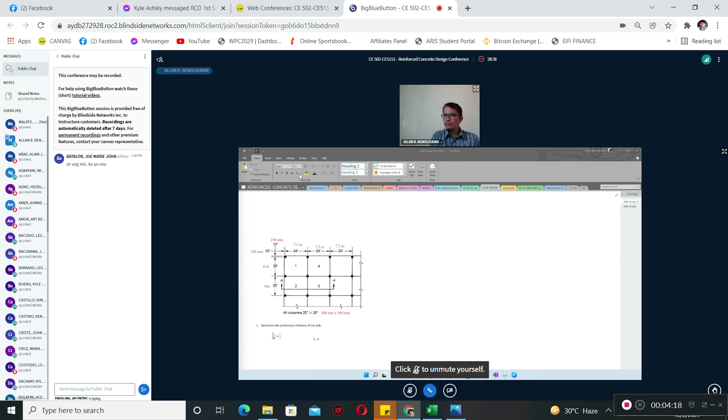Silence... does it mean that silence is that you understand? Well, let's try this. So I would like you to please understand.

Now, this is to me a very nice experience, very nice experience for all of us, especially if you're going to model that one. I know that it will take us time to do moment distribution method, or if you want, slope deflection method for the frame, because it will take you a lot of time. Even me, I think I will not do that.

So instead, I said that you are going to use STAAD, and I would like to know now if... anyway, Malate already said that he's just doing something more on the STAAD. I hope that you are there already. It needs time, okay?

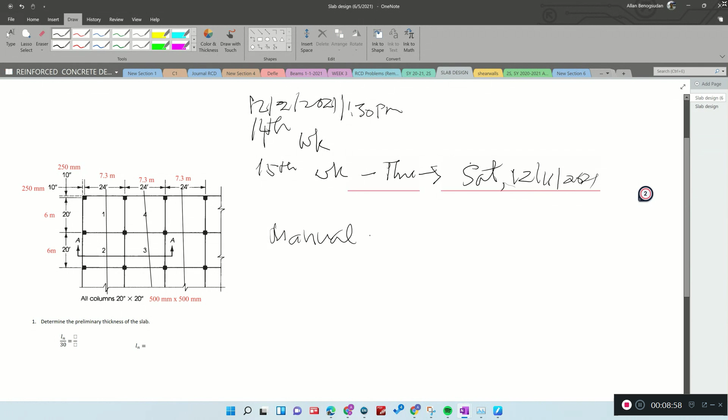Okay, manual design of all your design. Manual picture design, yung resibo kanina. Many times I said that, many times I said that.

If only all our students are doing this, I think all of us are immersed in doing calculations, and I think you have a very good fighting chance during the licensure exam. I think this is the best way to do these things.

Okay, now you please doing this, okay, start doing the calculations, because when you don't have this, you have a lot of deductions. Okay, because first you do not follow instruction. Okay, I'll repeat.

Okay, maybe you will wonder that you did not make it in this class because I also have you also have your what we call this design report. Okay, but as I've said many times already.

Okay, I'll repeat. Okay, you're doing this in Staad. All the models that you are going to do, you do it in Staad so that you can easily just get all those, whether it's axial, whether it's torsion, whether it's shear, whether it's flexure.

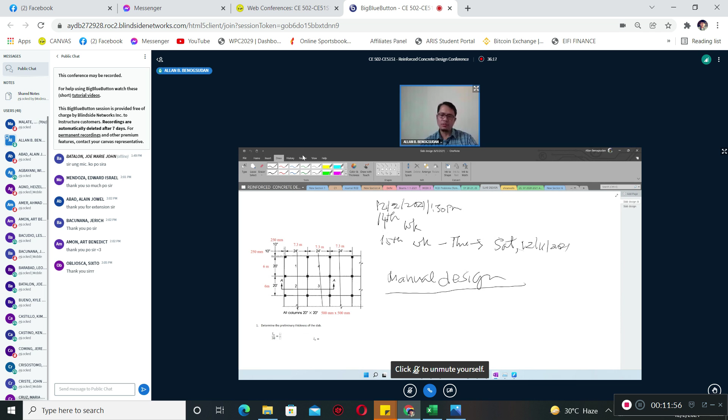It would be better if you have it this time. I think I myself used to call it creative delay for our students. What is creative delay? Some of our students are, how can I describe them, they are late bloomers. Sometimes some of our students only get their best when they fail. As I've said, some of our students who top the licensure exam, I'm not saying it's because of me.

No, it's not. It's all our department. We help each one of us to get you through the licensure exam. That's our thing.

Okay, and of course, especially me because I'm your leader, if our students cannot make it through the licensure exam, let us pause for a while and think about it. What could be the reason? What could be the reason?

So when you are with me and sometimes you did not make it, I would say it's a creative delay. You'd rather have it, you'd rather fail here rather than in the licensure exam.

And also, the best way to do that is you always have that mindset of I'm going to make it, I'm going to make it, I'm going to make it. But when you do those positive affirmations and you have not done anything, I think...

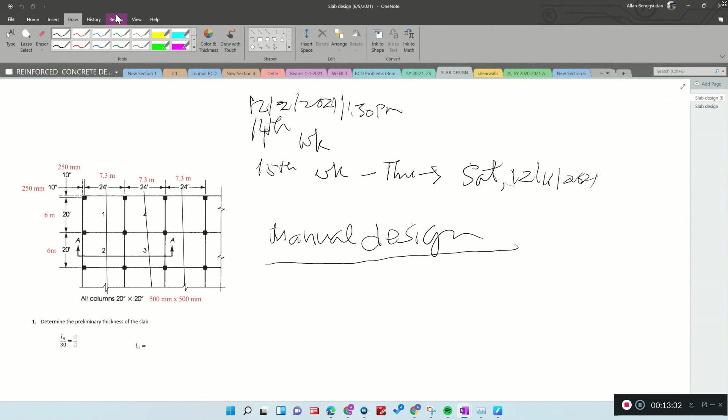Kumbaga sa atin sa Tagalog, taliwas yun, di ba? Taliwas. So kailan lang lumabas yung licensure and that it's sad, okay? It's sad. Get this.

We can easily just get. Now what about this? Like As fy. What about this? 0.85 f prime c. Is that right? So you can lay out that, you can lay out these equations.

So you just have to look at all those things that we have discussed and apply that. Okay?

That is when it's only tension. Now what if you are going to consider, now all of these are hypothetical. So how am I going to check your work? I hope that I'm going to have all these things recorded. We have recorded this. So how do we check our work? That is that you have gone through this...

Hypothetically comparing, comparing what if this one is this, what if this one is that. Okay, just for the computation of this design. Okay, now is that mu the one that you are going to take here? Think about it.

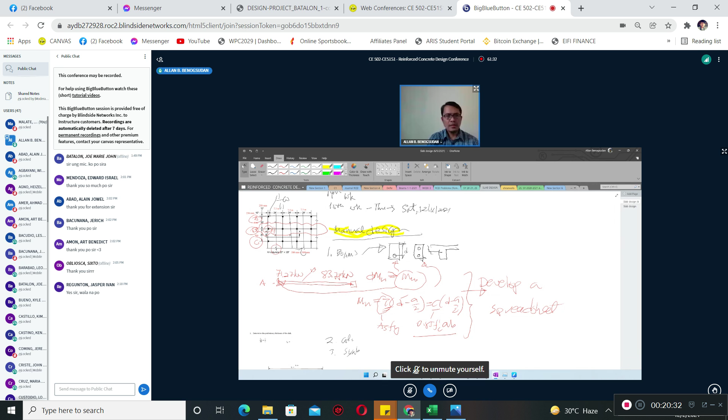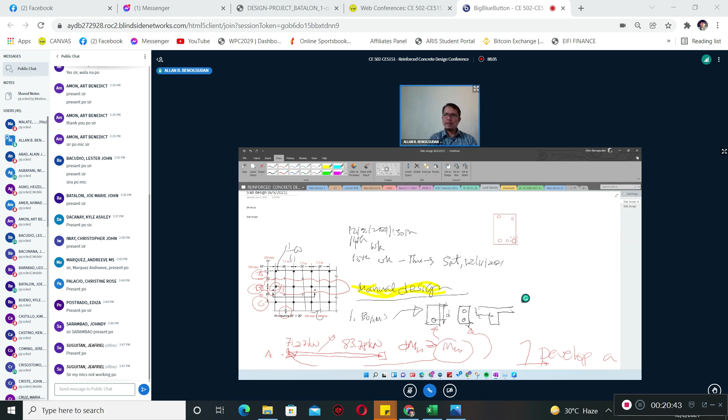STAAD will give that one to you, and all the moments - you just have to get the moment and that's it. Do you understand what I'm talking about? I do not know if you understand.

You have to say. So again, this is our fifth meeting for discussing this, and I think we just give justice for the entire 6 units. This is our fifth meeting for this. We still have time.

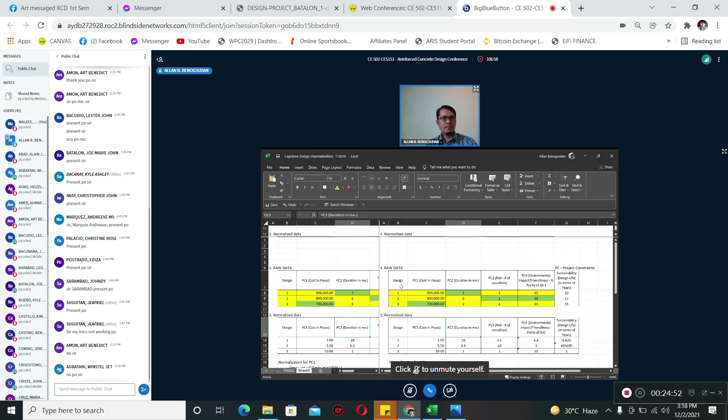Tell me if I'm not able to. Okay, so this is the raw data. You have, for example, design one, two, three. This can be likened to what we call trade-off. And this one, PC1, PC2, PC3, and so on. Here in this example, we have five constraints.

Pili ka nga dito - one, two, three, four, five constraints. Five constraints, ano?

We have to know how much is design one. For example, you are talking about a trade-off in terms of framing. Framing is undoubtedly part of the building design.

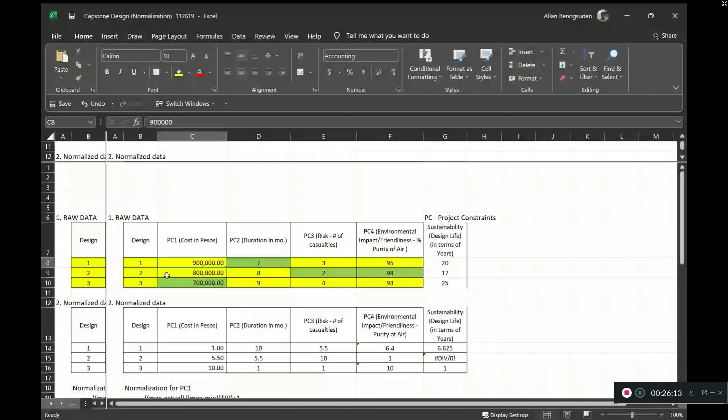So we have gravity, and now we have also LFRS. So then we compute that. How do we compute this? Do you know how to do that? I think you know how to do this.

So I think in doing this, you just have to get a representative sample. Say for example, if you have a frame that is a 5-story frame or whatever, then maybe we can compute that design. That's why it's important that we have an initial design, and then we finally do that one in chapter 4.

Now, if you can get data like what we have from Max Fajardo - are you familiar with Max Fajardo, where we have numbers to multiply so that we'll be able to get the number of bags for cement and so on. That's how we do that.

For example, another trade-off for the flooring - you try to do per square meter. You can do it entirely first. Anyway, it's just that.

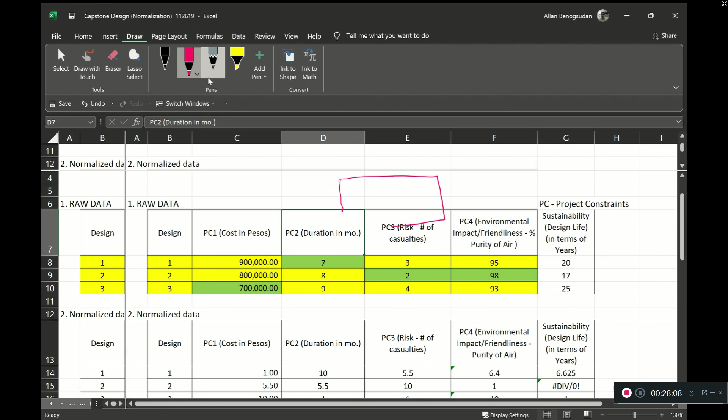Have to draw for a while, okay? I think it can also be a thing that you just do. You just don't know how to do it.

For example, that one is overall—what is it? 30 meters, 75 meters, 24 meters. So that's the entire slab. Do you think we can just design 1 meter by 1 meter? Or maybe we can do this all throughout. Then we get, if that is your slab, okay, so if that is, say for example, 180.

80 mm, for example. I have a design supposedly to discuss with you, but I'd like to discuss it because maybe you don't have much time to do these things. So this is your thickness of the slab, and you have gone through how you were able to say it's 180. So you can say thickness is equal to L over 20.

That's our technical side. So you want now to do that. So the area is equal to 75 multiplied by how much is that? Say for example that is 25. 25 square, that is in terms of square meters.

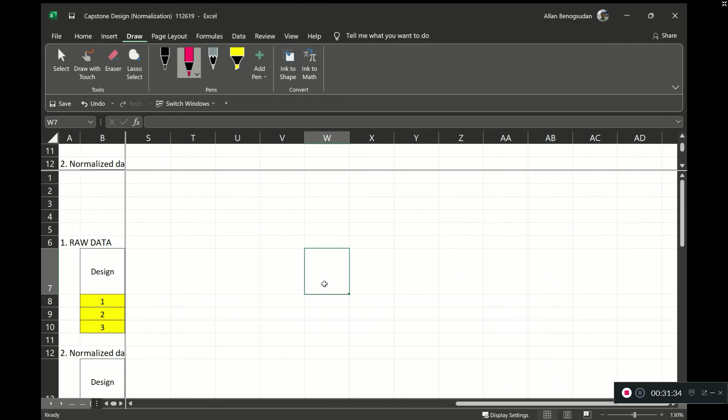Please tell me if I'm out of your range. Okay, say for example, just an example, this is 1,000 mm. One is 180. So you can get the volume here. Okay.

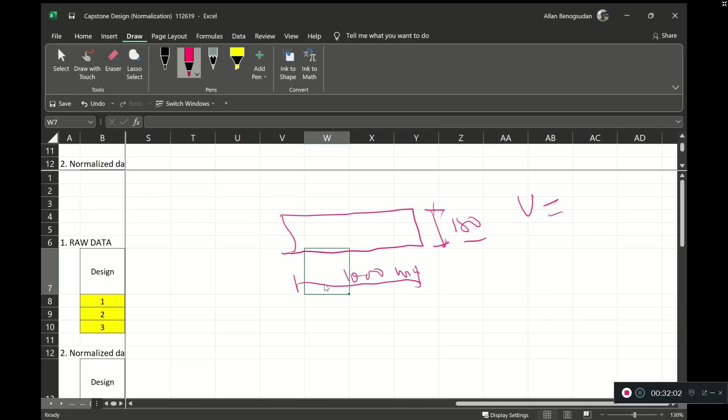That area, that is when you design—that is when you design for one way. Okay, so we will discuss that. So the area which we have done already, multiplied by 0.180, then you have your volume. Is that correct? So on and so forth for this. So you have your concrete.

Have your rebar, you have your formworks. But I hope that you have these parameters already from your capstone design one. Do you understand when I say parameter? Okay, so that you know, if you have this area, that can be good, that can be good if your costing, for example, for the flooring is equivalent to either per cubic meter or per square meter.

Per meter. But no, I'm sorry, I'm talking about per square meter, pesos per square meter. But I think the drawback here is that you still have to categorize what thickness. Did you get me?

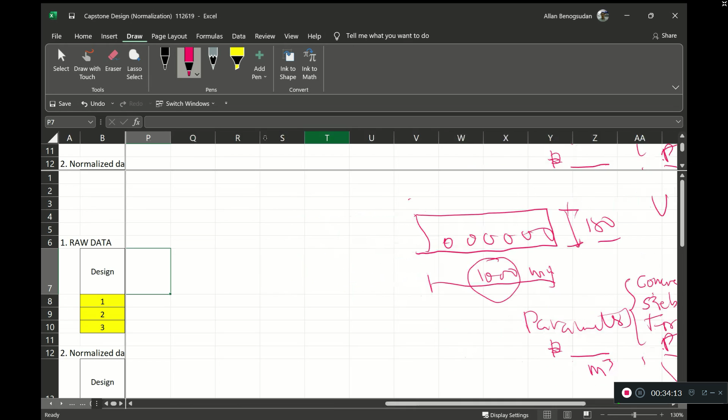Now for the duration, that you know how to do scheduling. I'm not so keen on this in this class, in this reinforced concrete, except that if you're in the capstone design, then I would ask you to—even if it's here what we are doing—maybe you can have the parameter how to compute for this, for example, how long you are going to construct this project, this design.

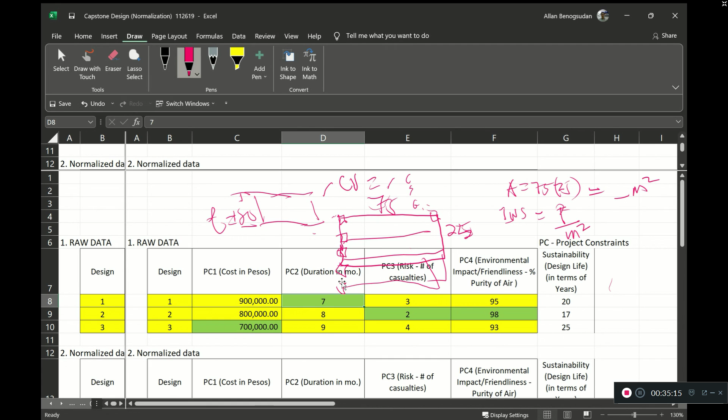Okay, if that is in terms of computer engineering or maybe electronics engineering, then maybe they can—how many parts. Okay, for civil, of course, we are civil, then we're talking about how long you can construct that. Now there's another one which I think is very important for all of us: the risk. Okay, risk, number of casualties. What could that be? It's part of our—I already told our faculty members to have it. Now, what could be the risk?

Now, I think this can be just rating. Okay, when I say rating, what do you think are the risks if you are going to do this design? For instance, let us have this as our risk. The risk is that it might fall or deflect during construction. What could be the possibility? Do you understand when I say rating? You can just use a rating, like 1, 2, 3, 4, 5. Okay, so that is a rating.

But you also have to discuss your rating alongside in a paragraph or so. How did you come up with your rating? If there is an existing way how to do that, then I think it's fine. Now, this one is an example, it can also be environmental impact, friendliness of the design, or air purity awareness. So then you are going to measure the purity of the air. You need to actually do that.

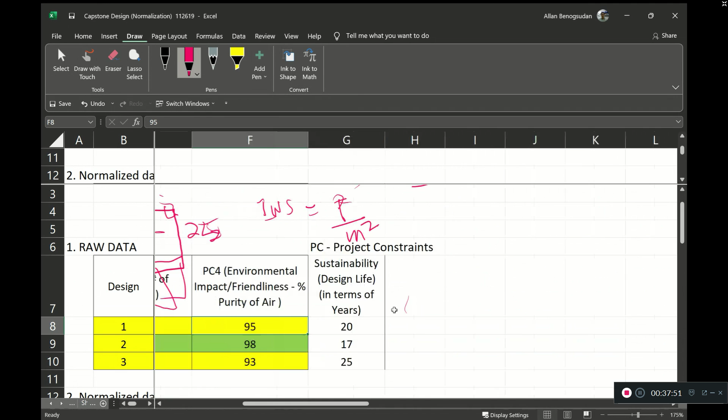And another one is sustainability, design life in terms of years. For civil structures, you can find it a lot. I would like you to use Google, for example, to check what are the expected life of the building, and relate this to lifelong learning.

But you can appreciate it more if you will be able to do this one yourself. There can be a lot of confidence, but even if you have that confidence, you just have to be humble all the time, because other people may be more knowledgeable than we are, so we always remain humble. What I'm saying is we should always do lifelong learning, and give some exercise to our minds, to our brains.

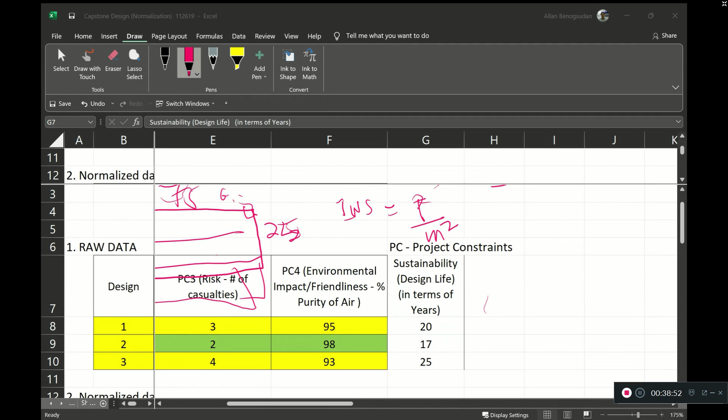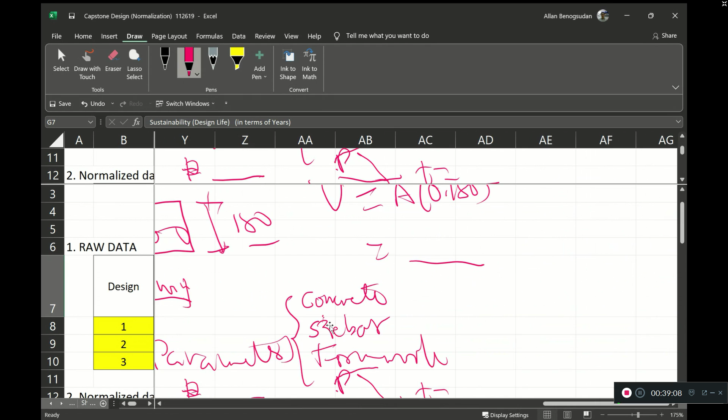All right, so that we know already how to do this. Today we really scrutinize how you are going to do this. I hope you are doing this. If not, if you just put these numbers there, then I would like to ask you, I would like to comment on the paper. How did you come up with this?

Especially if you make articulation or statements about this in your design constraint, I hope we do all these things. So the design can be any design. If this design is your one-way, this one is your two-way, and number three is two-way but flat slab. This one is two-way but with beams all around the panel of the slab.

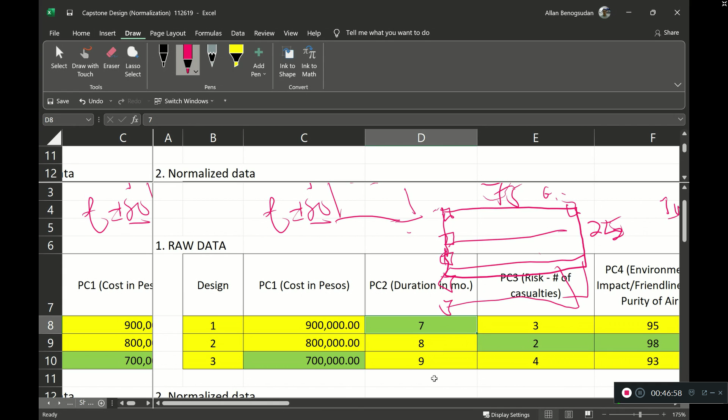Say for example, if you have area of 1,000 square meters for the entire 5 floors, how long will you do that? If, for example, per square meter you are going to do that in 130 days, you have to multiply it to know how many days. I think that is what we call parameters.

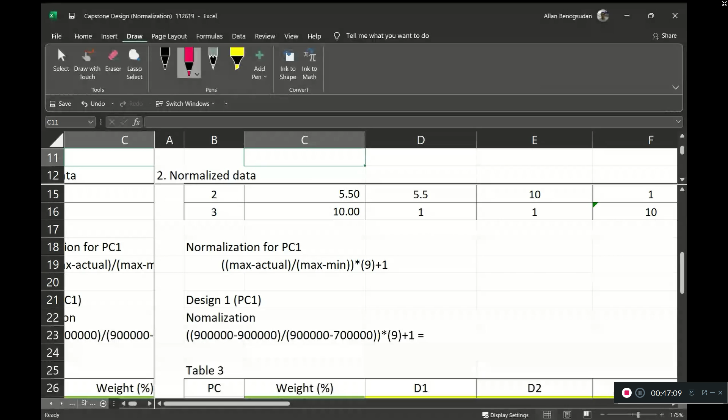If there are 10,000 cubic meters of volume, how long will we do that? So there is a multiplier, work or man-hour parameters, or equipment hours to do that. You just don't look at the ceiling and say it's going to be 30 months. It's not like that. So you have to articulate how long, and you have to put something there.

You have to support it with that man-hour parameter or equipment parameter, or whatever parameter fits your measurement. That's the way to do these things.

I think you are hitting two birds at the same time. You are doing your capstone design, and now we are also doing it here. Although it's not the capstone design, because we are only doing one material. Now, if you are doing a capstone design, you can also think about another trade-off in terms of using steel, pre-stress, timber, composite, many options. So that's the difference between what we are doing. But when you do the design of any structure, you actually do that.

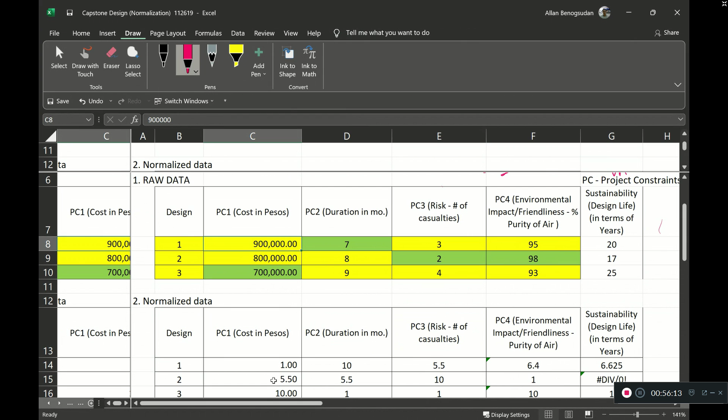Okay, so you have to choose that and put this one here. Normalization, for example, for constraint number one. Let us check that one. Does it matter? Does it make sense? Maximum minus actual, maximum minus minimum...

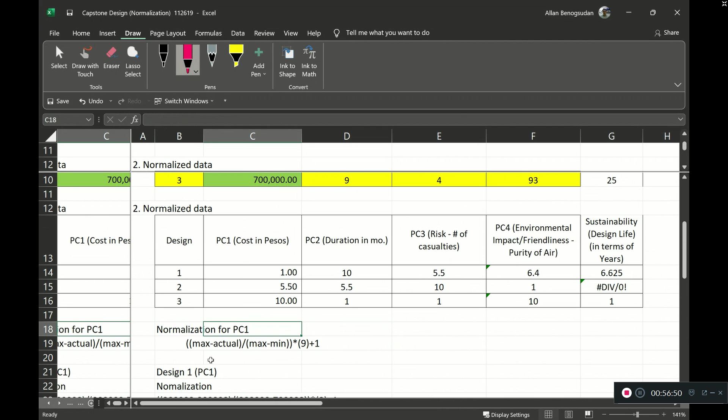And all of this multiplied by 9, plus 1, because if you are going to click the maximum, you choose the maximum, and what could be the actual? What could be the actual? That's a nomenclature from my point of view.

Okay, maximum, that's the maximum C8 minus that actual. Okay, these are all the actuals. For example, C sub 8.

Can you see the formula equation, the formula panel? Everybody, anybody, just anybody, can you see the formula bar so that I can... Yes, just. Sir? Can you see the formula bar? Sir po. Okay, thank you.

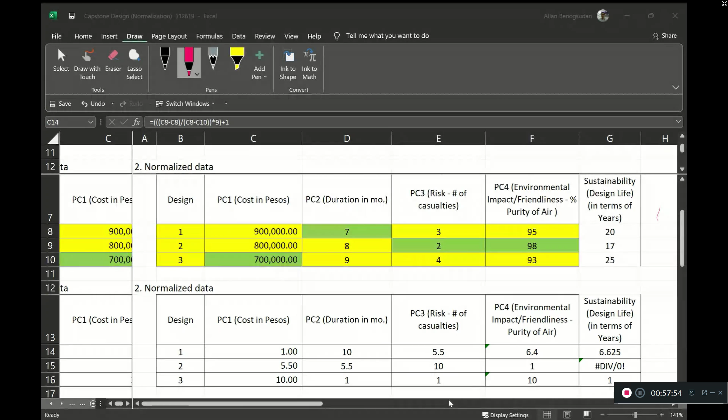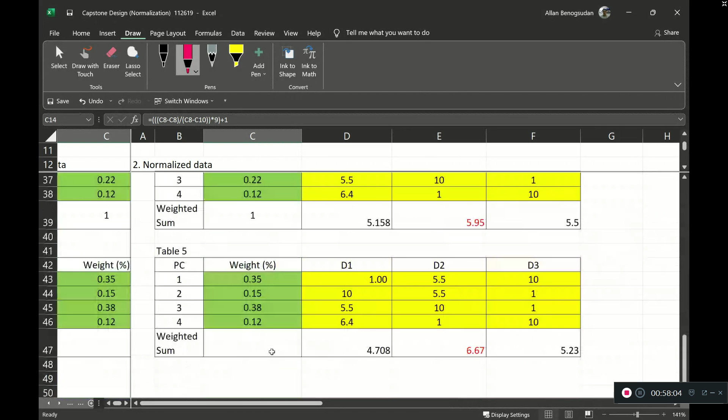Okay, I'll repeat, I'll repeat. So this is a very important understanding for all of us, so that you can use this. How do we know later what could be the winning, the winning design? Okay, winning design.

Okay, winning design. Is it design one? Is it design two? Is it design three?

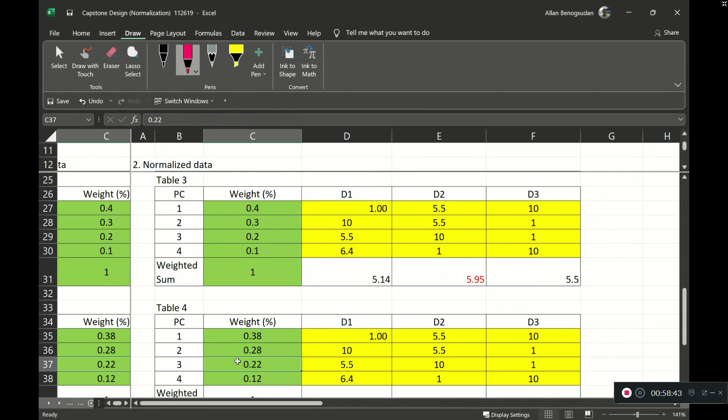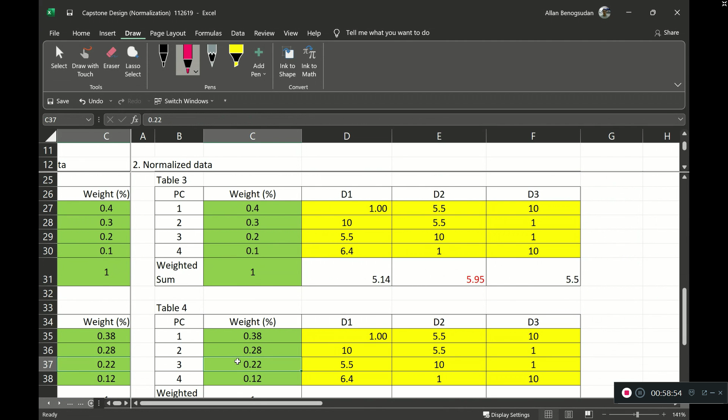Nice, this one is a very nice exercise. You can readily adapt this. So without this equation, even we can somehow forget the idea behind how we choose, how we normalize in the first place.

Of course, we associate that with your actual quantity, or whatever that is - is that the cost? Is that duration? Is that casualty? In whatever. Okay, so max, which is 900, and the actual, divided by the max minus the minimum, which is 700, multiplied by 9 plus 1.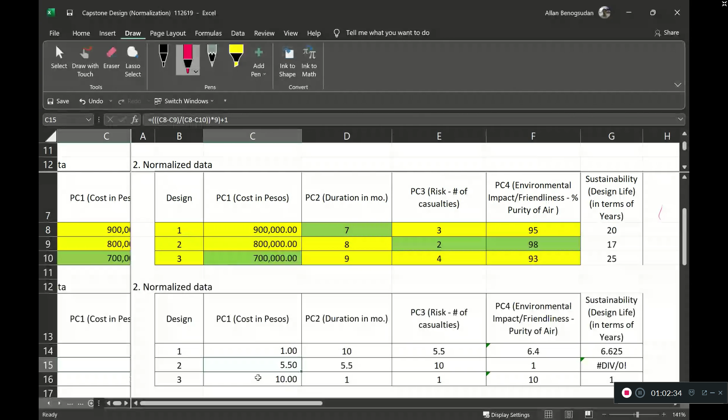The identification, okay, that's my way of doing it. Alright, so here we know already that the equation is that your max, it's the ratio of the max minus the actual, and that the actual is currently where you are, parallel to that, where you are trying to consider.

Example, if you are trying to do this number 3, so you get the max, which is C sub 8, minus the minimum, which is this number itself.

So it's 700, c sub 10 divided by, again, which of these 3 is the max. So it's 900, which is in c sub 8, in cell C8, from which you deducted the minimum, which is itself c sub 10. So that's how we got this. Okay, and that's our normalized data, and so on and so forth.

Again, what if you are going to consider 9? Okay, that 9. So d10, that is the max. d10 minus d sub 8, divided by the quantity max, which is 9, minus this of 8, which is 7, and so on and so forth. Now, because we deal with the extremes, here, you try to do this.

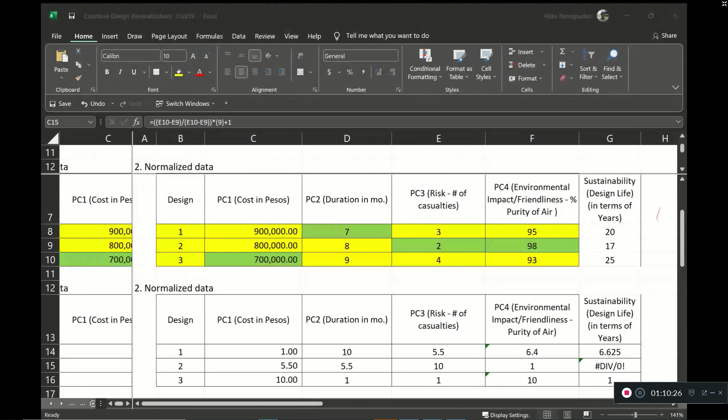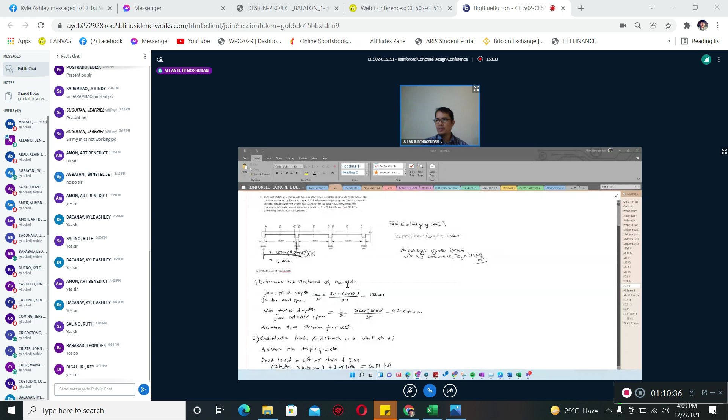I'm going to give this one to you. Okay, how to solve it. Please prepare for this. I think you can just read through this.

So instead of doing this one today, we again embark on our fifth meeting for the discussion of our design report, so that at the end of the day, at the end of the semester, there will be no star grading because we have not discussed it. So I think we have discussed it so well, from my point of view, and even if you did not ask it, I gave it to you.

Basically because I just want you to learn. I just want to say, for example, if I keep on talking about normalization and all of these things, and I have not tried to discuss it with you, I think it can be just futile. It's futile on my part, just keep on talking without giving it to you. But it should have been part of your capstone design. But when I asked you, you had not taken it up yet. Now, I am telling you how to do this.

This has eaten some of our time instead. But I think not really, because 6 hours per week, one third of that should supposedly go to our discussion of our design report. But many times I have also asked you, many times I have asked you, are there questions?

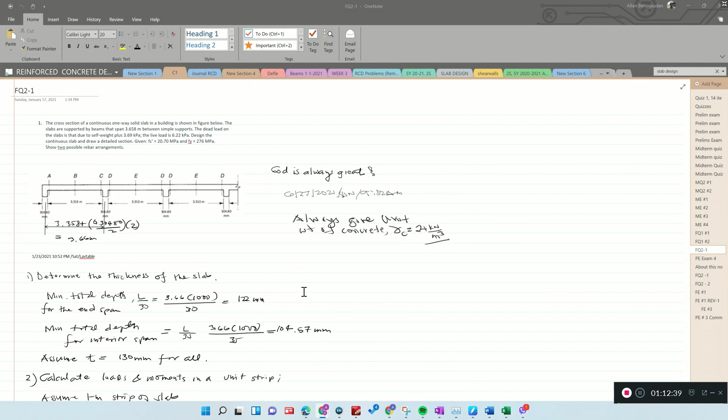But I cannot just say, if you do not have questions, then I'm going to conclude that everybody understood. I take it that if you're not going to say okay, then I'm going to do it for you. So this is how to do that.

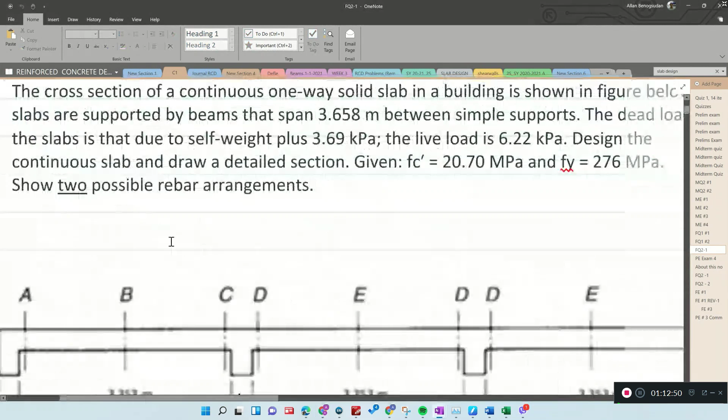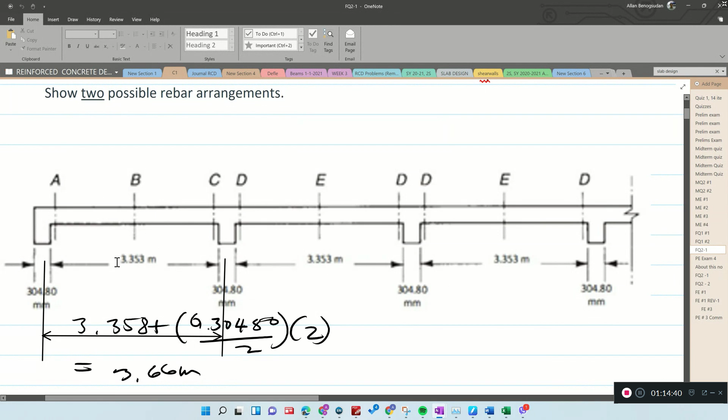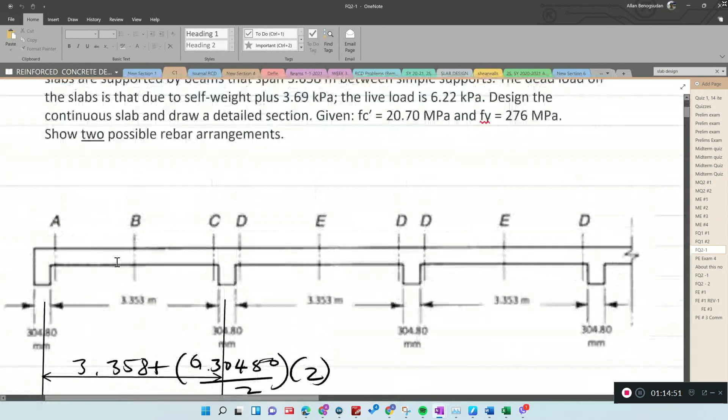It's a one-way slab. Look at that one-way slab. The cross section of a continuous one-way slab solid in a building is shown in the figure below, like that. Because really, our buildings are always almost continuous.

Always continuous. So the slabs are supported by beams that span 3.658 between simple supports. The dead load on the slab is due to self-weight plus 3.69 kilopascals, and the live load is 6.22 kilopascals. Design the continuous slab and draw a detailed section.

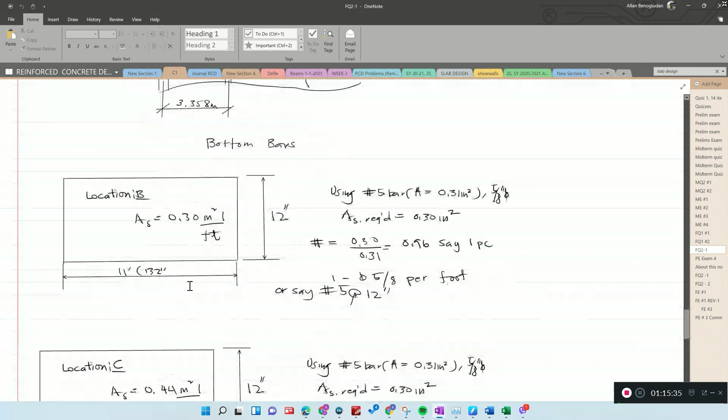Bars 0.5 by 8, location B, okay, and that.

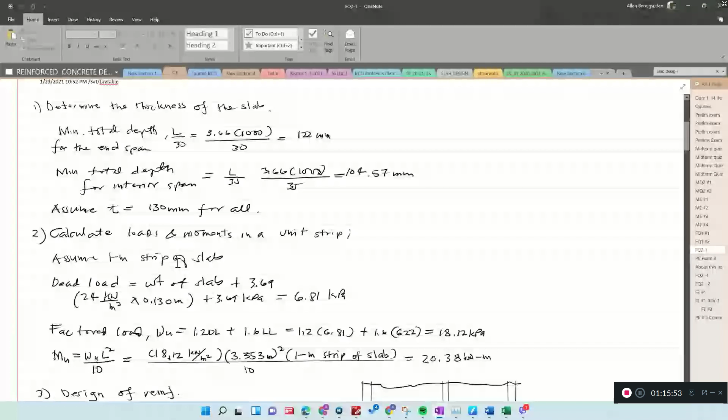From anywhere else, so you just have to read. I might be getting this again from books that we are using. So, determine the thickness of the slab.

So this one, you have to be careful here. L over 30, L over 20, L over whatever. Why is it L over 30? Because it's for the end of the slab. So you have to consider this.

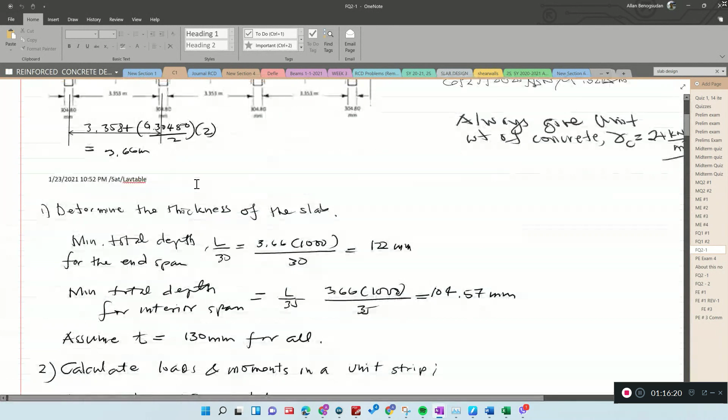Are you going to consider a slab which is, for example, you have one slab, say for example here, this one here you have 200, this one here you have 180, this one here is 120, and that is the reason why we consider this.

So that you have uniform thickness for the slab, and also that has an effect on the formworks, the formworks on the beam sides, because one is thicker than the other. That's the reason why I choose L over 30. We choose L over 30.

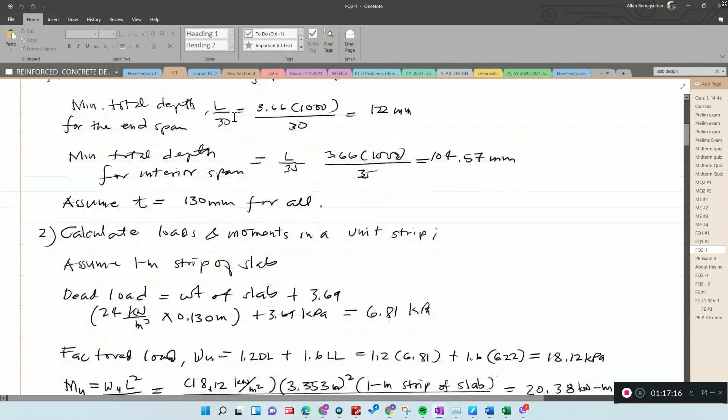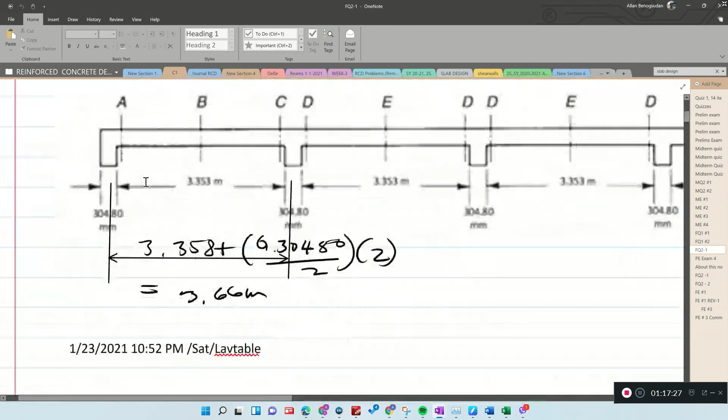So 3.66, that's 3.66 here. That's how we solve it. I think our discussion is very, very detailed, I would say. I put that all in for you to check on.

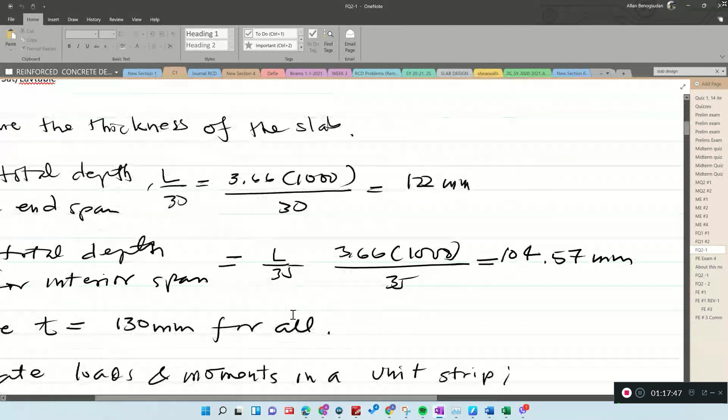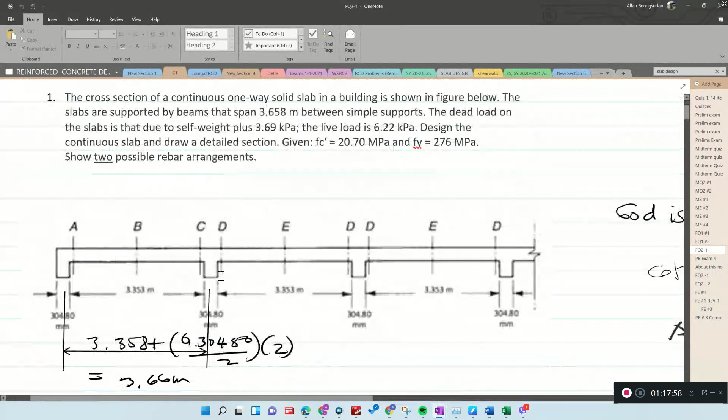I think it's just straightforward. So minimum total depth for interior, and that is L over 35. In this case, when I say 122 for the end of the slab at this point, for interior also, we do not want that because it will affect our beam formworks.

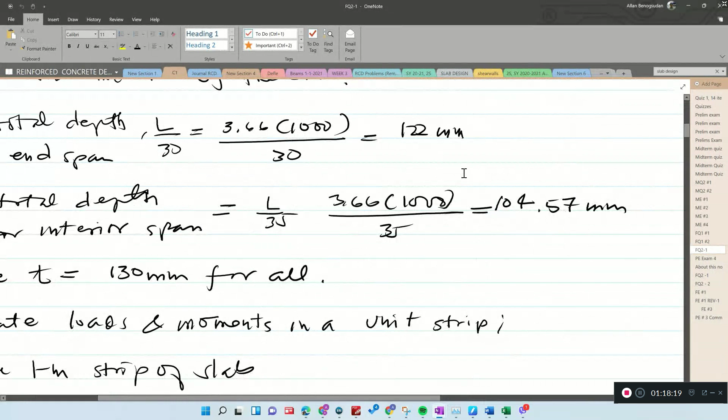You are going to say in your solution, assume, if that is 122 to 104, someone might say 125. I think you also have to consider, if that is 122, you're talking about 125 only. What about the cover? But don't make it too expensive for your trade-off.

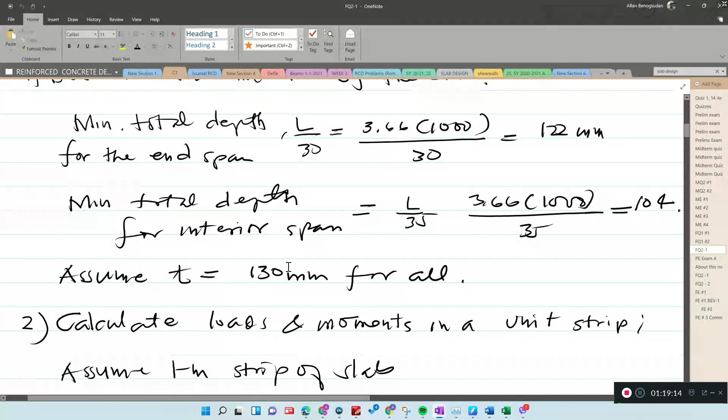That is how you can play with these things in your manual calculation. Don't forget manual calculation. You will not make it if you don't have it, because that's our purpose, to enable you to apply all those calculations that we have. Apply that in your work, and even if I am doing it like this, if you have improvements on this, then I think there's no problem. You can do it.

So, number one, determine the thickness of the slabs.

Calculate the loads and moments in a unit strip. So assume a 1 meter strip of slab. If that is in English units, it's only 1 foot.

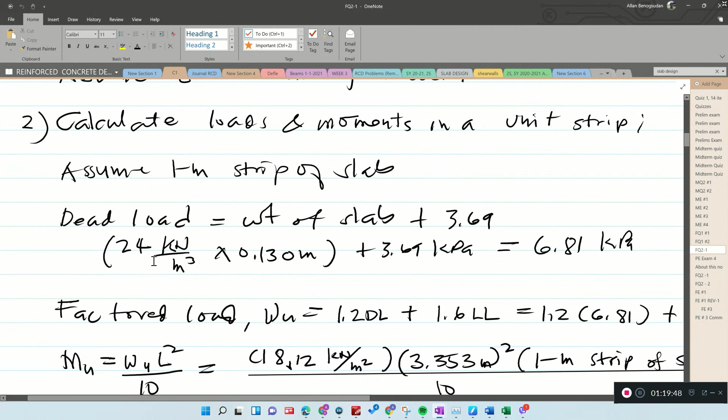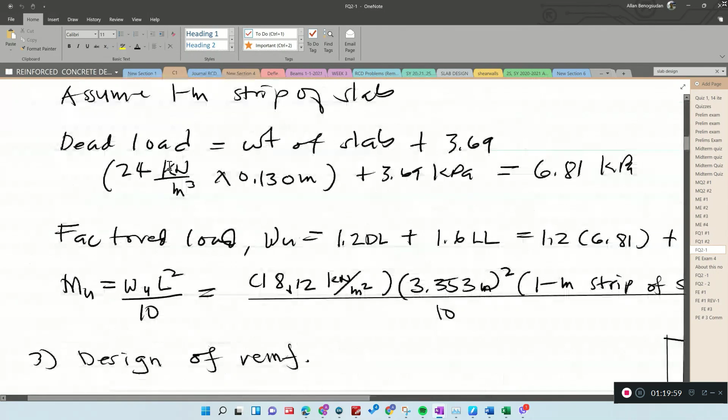Okay, only 1 foot, but for SI it's 1 meter. So you compute for the dead load. Now, if I am not going to give you the unit weight to use... I think I would like it to use 24 kilonewton per cubic meter. You multiply it with your assumed thickness, which is 0.130, then plus 3.69, 6.81, then factor the load.

So this is part of the MU that you are going to get from STAAD. That's how you connect all our understanding into what we now call a digital way of computing, of designing or analyzing structures. So how do we interface all of those in these calculations?

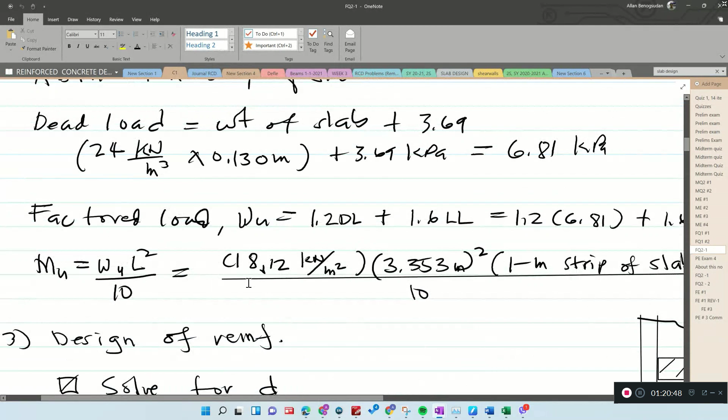So anyway, I've said that one already. So for MU, you will be the one doing this, just do a verification like this. But if you're going to do STAAD, I think STAAD will give you the best, or the max, from the several combination load cases.

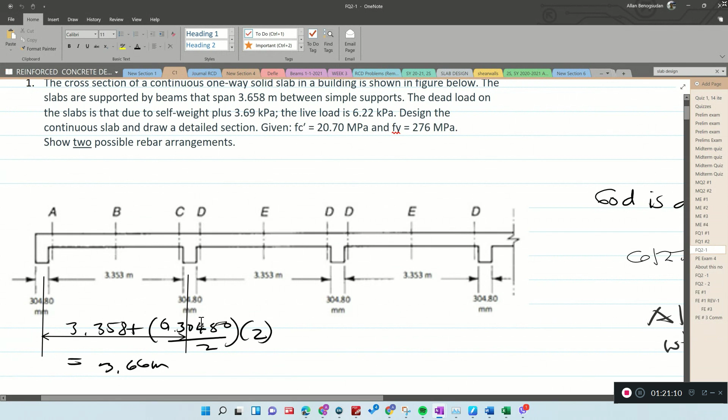So it might be that you will have a difference, but it's nice to do this in our design report presentation. It's nice to do that.

Okay, so if this one is given, then you just do the simple 1.2 dead load plus 1.6. Then maybe you try to get later how much is the STAAD value. Is the STAAD 20.38 kilonewton meter? That's very nice to verify. Okay, so that is the 1 meter strip I am referring to.

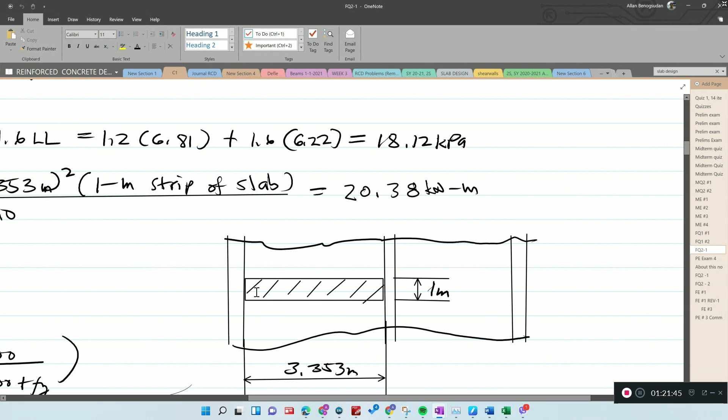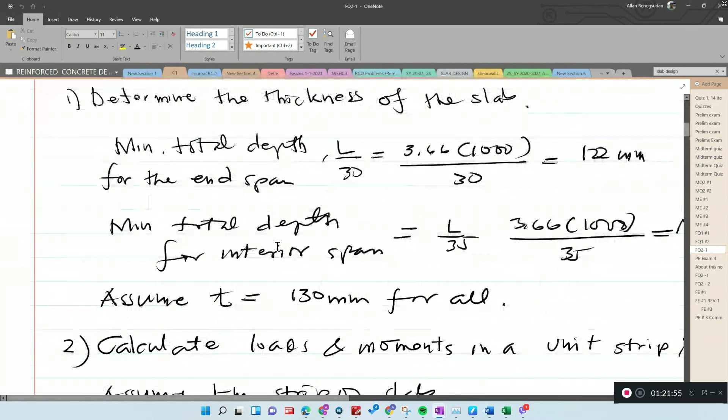So for design of the reinforcement, solve for D. We do not know the D yet, the effective depth. We only have the entire depth as 130. So calculate loads and moments in a unit strip.

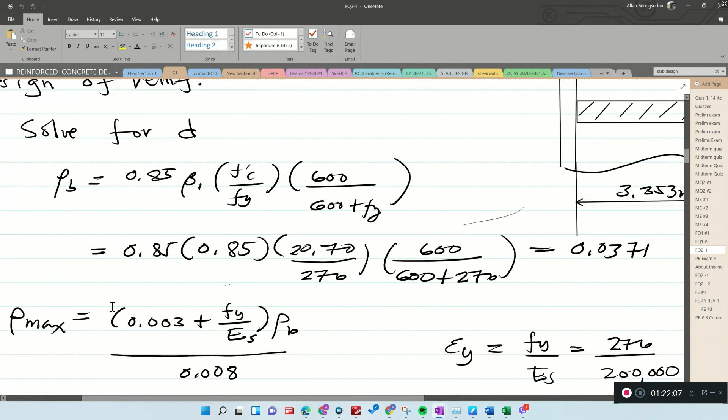We're done with that. For the design, you have rho balance, you can use this, then you do the rho max. Don't be deceived, try to understand again from the point of view of beam design. You have your rho minimum, rho max, rho balance, and rho actual. Okay, when do we use these rho values for getting your desired design for the rebars?

So what I did here is I used the rho balance. What do you think is the reason behind that? What do you think is the reason behind it? Okay, then I said rho max. You get the rho max and you apply this here.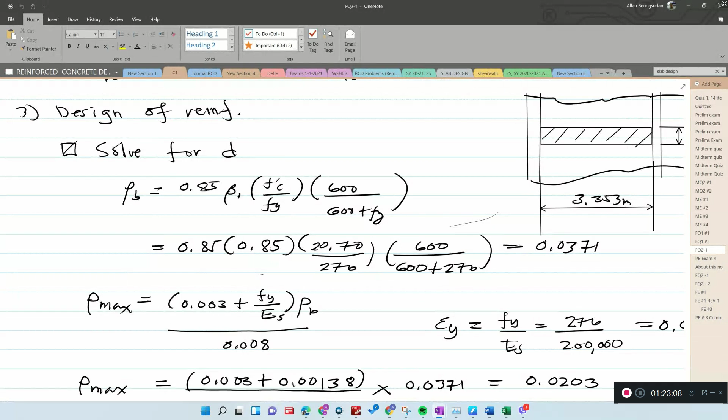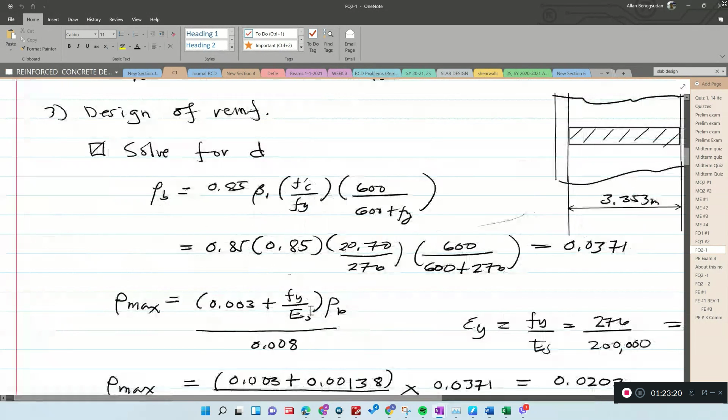It's very nice to do this, especially if you have done this in your design report. So you compare that and put it here. So phi for tension control is 0.90, and I think I have this as an example. Please check our example for flexural design, I think I have this for you.

Then you use this, then you use 69.33. Then you solve the area of steel, rho bd, then 0.0203. So where do we get the rho bd? Let us check. So we use the rho max.

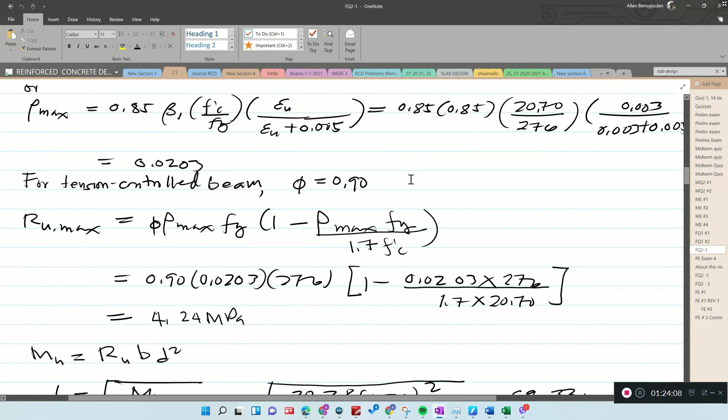Okay, now I would like you to check this. I would like you to check if really this one yields. I'll repeat, I would like you to check if really this yields. Okay? I hope you understand that.

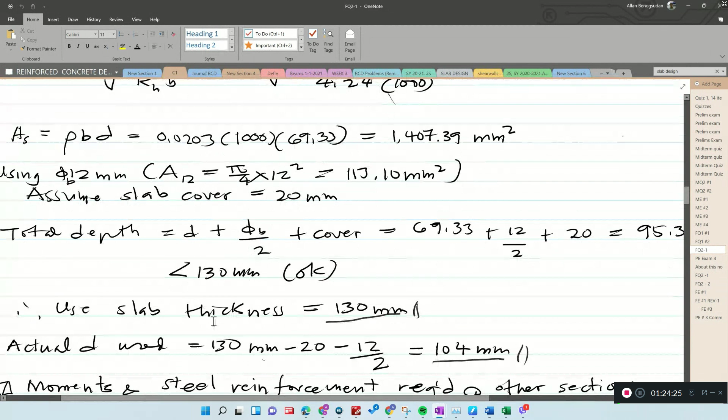Okay, so total depth, got it here, 95.30. No, so that's it, all right, 130, because even our reinforcement can handle 95.33, but there's another thing we did initially.

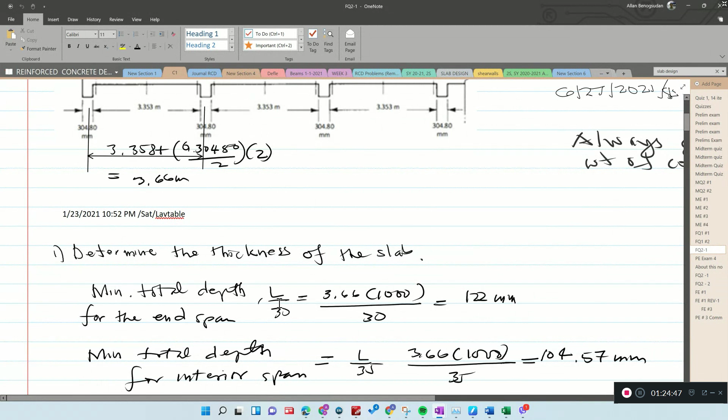We're talking about the serviceability limit. This is what we call the serviceability limit. So the one we have considered in this design is the serviceability limit.

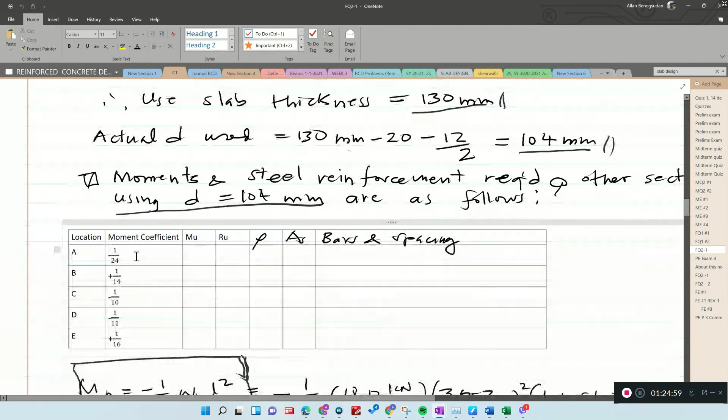All right, so I just put this one here. I manually solved them one by one. Okay, so any question before I end?

So we'll have at least, I think, two problems about the two-way slab. Only two problems, okay, only two problems. We will do next week the design of two-way shear, a two-way slab. Anyway, I think before you do some refinements, maybe we can do some refining discussions on Tuesday, Thursday, and Saturday. Then you submit that.